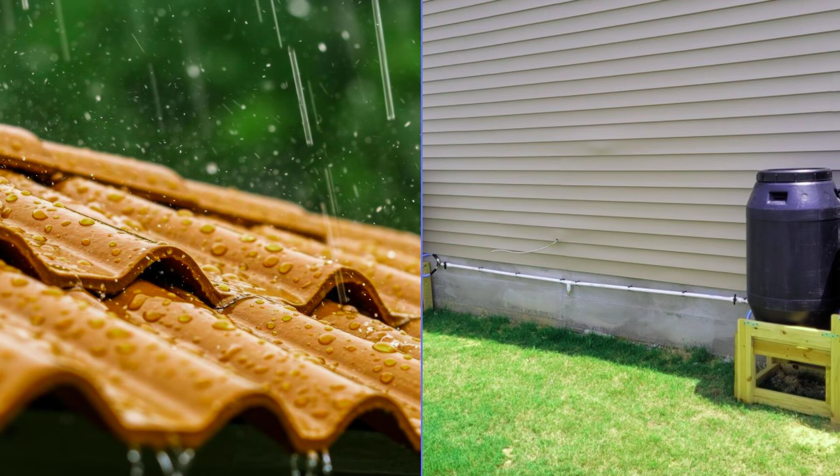Prior appropriation doctrine, written in the 1800s, claimed every raindrop as tributary to streams you have never seen. The water falling on your roof belonged to someone downstream before it hit your shingles. A 55-gallon barrel was a threat to agricultural water rights. The law said so. It is called rooftop rainwater harvesting. This is not a story about physics that does not work. This is a story about physics that works too well without generating a single bill.

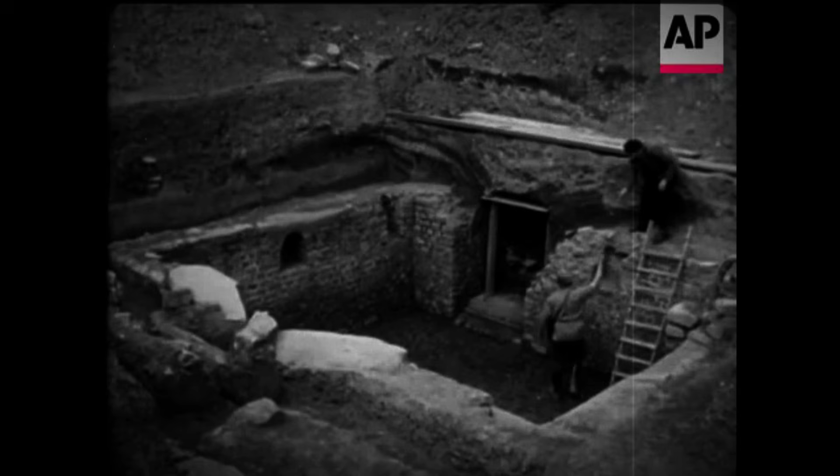Welcome to Forbidden Manual. The archive opens in 1930 in the jungle heat of the Yucatan Peninsula at the ruins of Uxmal. Eduardo Martinez, Chief Inspector of Archaeological Monuments for the state of Yucatan, stood before a hole in the limestone plaza that most visitors walked past without a second glance. It was bottle-shaped, carved into the bedrock, lined with plaster so fine it had survived 1,000 years of tropical storms.

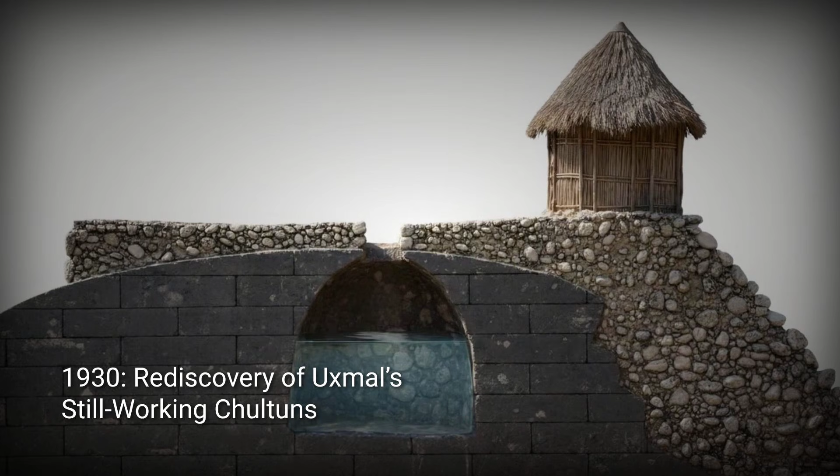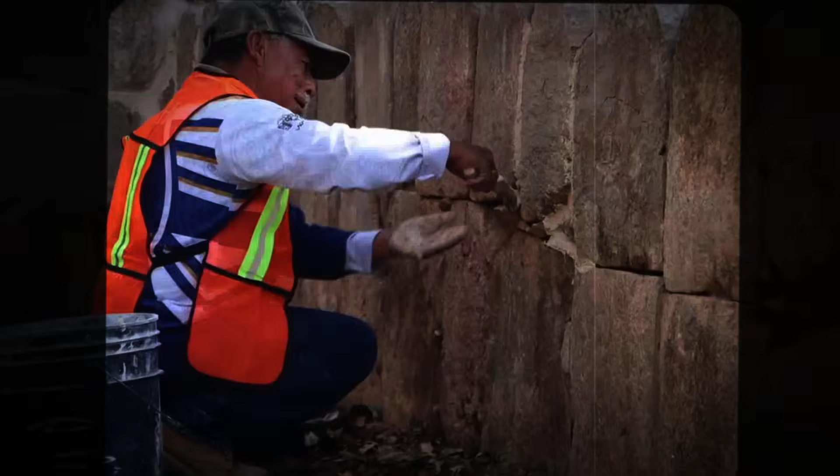The Maya had called these chambers chultuns, underground cisterns, designed to capture every drop of rain that fell on the stone surfaces above. Martinez made a decision that would prove more than he intended. He ordered the ancient plaster repaired. He allowed the cistern to fill. Weeks later, archaeologist Frans Blom arrived with his field crew, expecting to haul water from miles away. Instead, they drank from a cistern built before Europe had indoor plumbing.

The water was clean. The system worked. The Maya had solved this problem a millennium earlier. This was not a museum exhibit. This was functioning infrastructure. The Yucatan has no rivers, no lakes, no surface water at all in the Puuc region where Uxmal stands. The Maya sustained cities of tens of thousands using nothing but rain, stone catchment surfaces, and underground storage chambers carved into bedrock. They did not wait for engineers to invent the technology. They were the engineers. But the Maya were not alone.

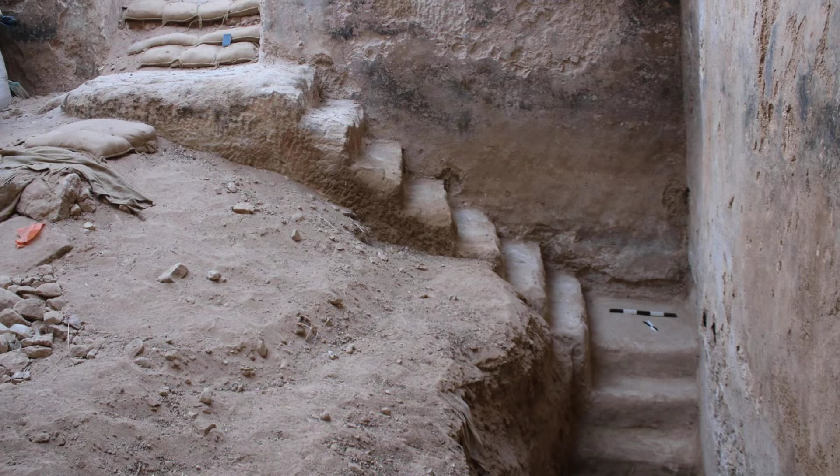Push the timeline further: the Negev highlands of the Levant in the 3rd millennium BCE. Peer-reviewed archaeology documents cistern systems designed for runoff and floodwater capture, baseline survival technology for Bronze Age civilizations across the eastern Mediterranean. The ability to store rain was not a luxury. It was the prerequisite for settlement. This was not experimental. This was civilization.

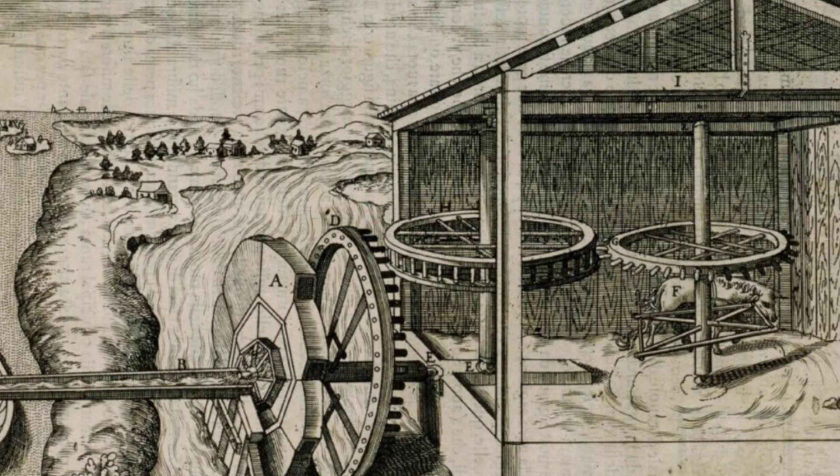Now move forward to early modern Venice. Historian David Gentilcore, writing in Water History in 2021, documented the city's dense network of cisterns, a fourth domestic water option alongside rivers, aqueducts, and wells. Venetian builders designed catchment surfaces, filtration layers, and storage chambers integrated into the urban fabric. Residents of one of Europe's most sophisticated cities drank captured rain. Venice was not off-grid. Venice was the center of Mediterranean commerce, and its water came from rooftops.

Four civilizations, four climate zones, four millennia, the same physics. Roof sheds water, gravity moves it downward, storage holds it until needed. The rain still falls, the roof still sheds, gravity still works. What changed was not the physics.

What changed was ownership, not of the water, but of the legal right to touch it. In 2010, the Texas Water Development Board contracted a team at the University of Texas at Austin to answer a question that seemed almost too simple. What happens to rain when it hits a roof?

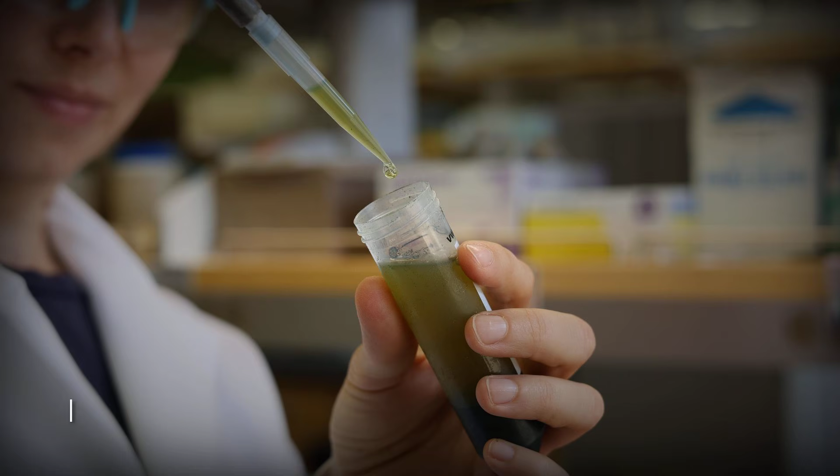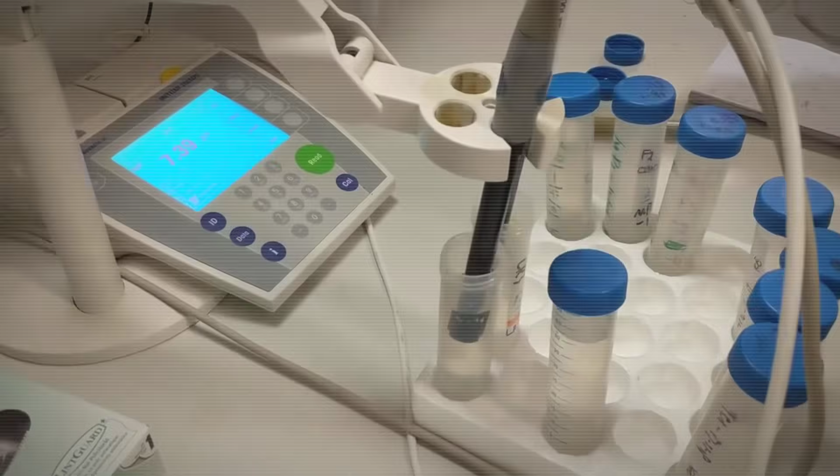Carolina B. Mendez and Bridget R. Afshar led the fieldwork under faculty researchers Kerry Kinney, Michael E. Barrett, and Mary Jo Kirisits. They built pilot-scale roofs using asphalt fiberglass shingle, Galvalume metal, and concrete tile, and they collected the runoff. They measured pH, they counted bacteria, they tested conductivity, they documented what the Maya had known for 1,000 years with the precision of a modern laboratory.

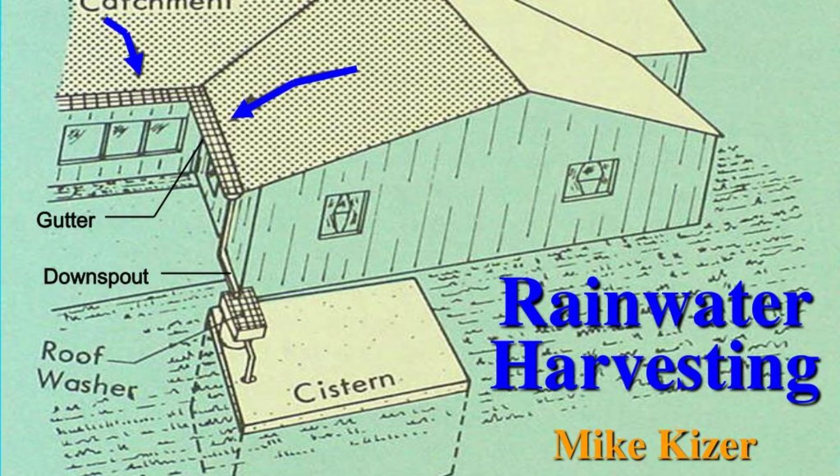Their findings were not controversial. They were inevitable. 1 inch of rain falling on 1,000 square feet of roof produces 623 gallons of water. That is the formula published by Texas A&M AgriLife Extension. Not theoretical yield, actual volume, minus only what splashes out or evaporates before reaching the gutter. A moderate storm on a modest home delivers enough water to fill 11 55-gallon barrels.

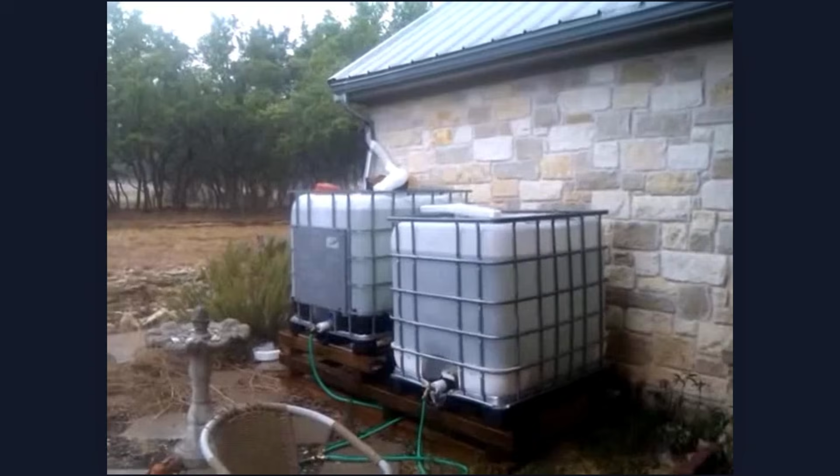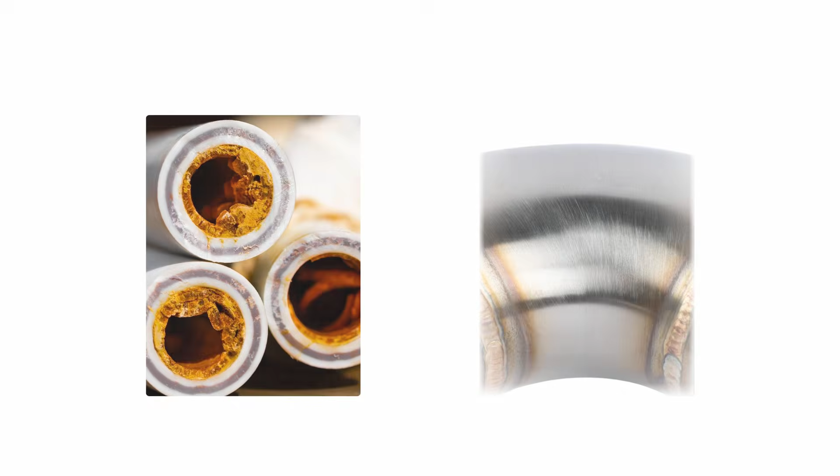The water arrives soft. The Texas Water Development Board confirmed what chemistry predicts. Rainwater has zero hardness. No calcium, no magnesium, no mineral deposits scaling your pipes, fouling your water heater, or leaving white residue on your fixtures. The agency's own manual describes rainwater as valued for its purity and softness. No treatment required for that quality. It falls from the sky that way.

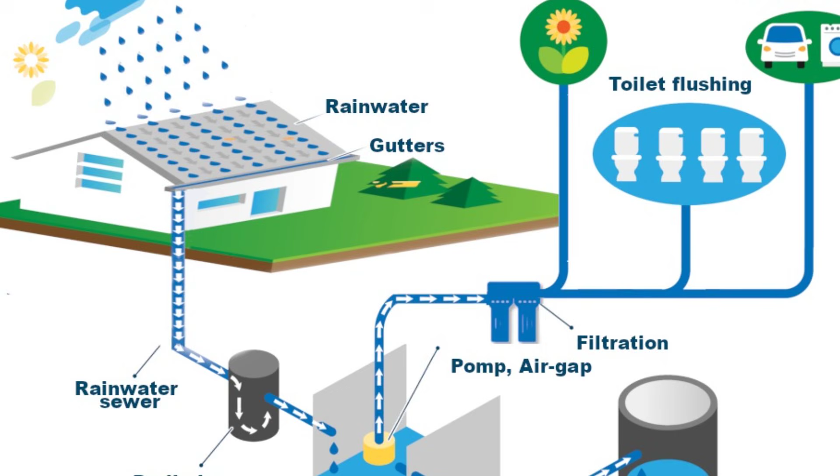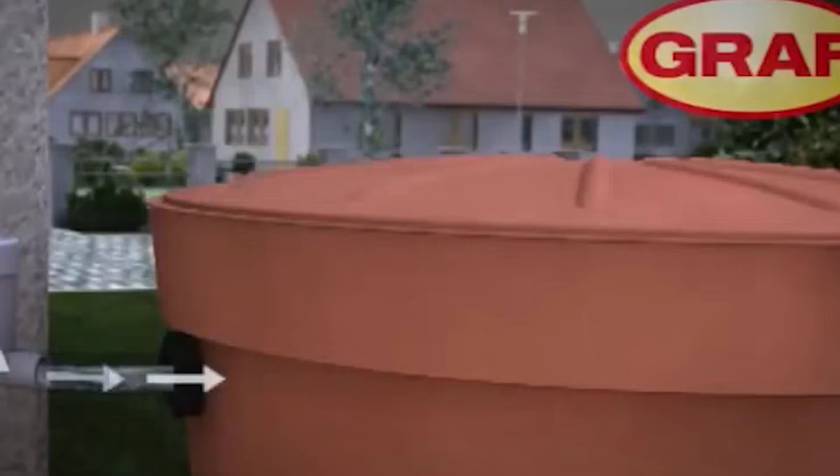Real-world capture systems lose some yield to overflow, first flush diversion, and roof wetting. 75 to 90% efficiency is the planning assumption. Contamination exists. Roof runoff carries dust, pollen, and bird droppings. First flush diverters route the dirtiest water away from storage. Filtration handles the rest. Potable use requires treatment, but the baseline quality starts cleaner than most municipal sources before chlorination.

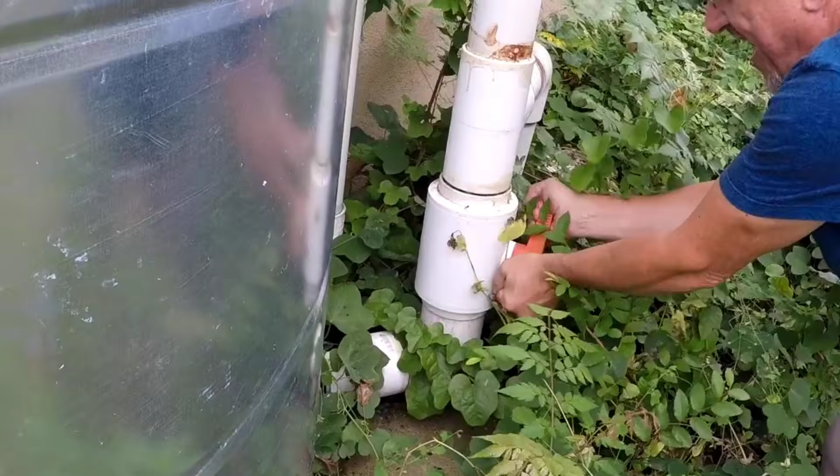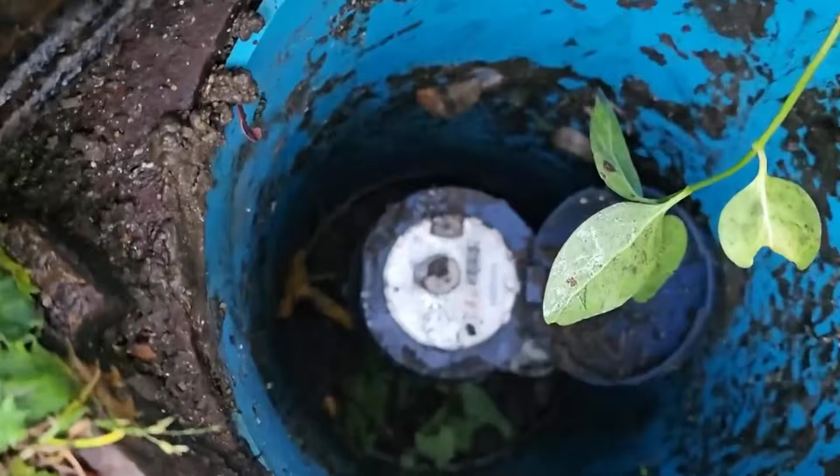Now feel what this means in your own home. Picture January. Your water bill arrives. $62. You paid for every gallon that came through the meter, the shower, the laundry, the dishwasher, the toilet you flushed 11 times yesterday. Now picture June. Your garden is dying in the heat. You drag a hose across the yard and watch the meter spin. Every gallon that touches your tomatoes adds to next month's bill. The rain that fell in April, the rain that pounded your roof for 6 hours, is 40 miles away in a municipal treatment plant. They are selling it back to you.

Your roof is already a catchment surface. Every storm, hundreds of gallons sheet off your shingles, pour through your downspouts, and vanish into the storm drain. You are not installing a new system. You are interrupting a loss. The barrel costs $70. It lasts 20 years. The water bill comes every month, forever.

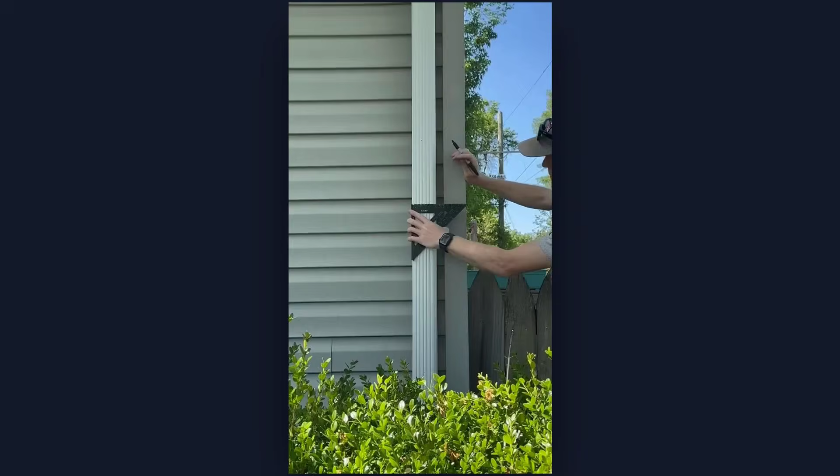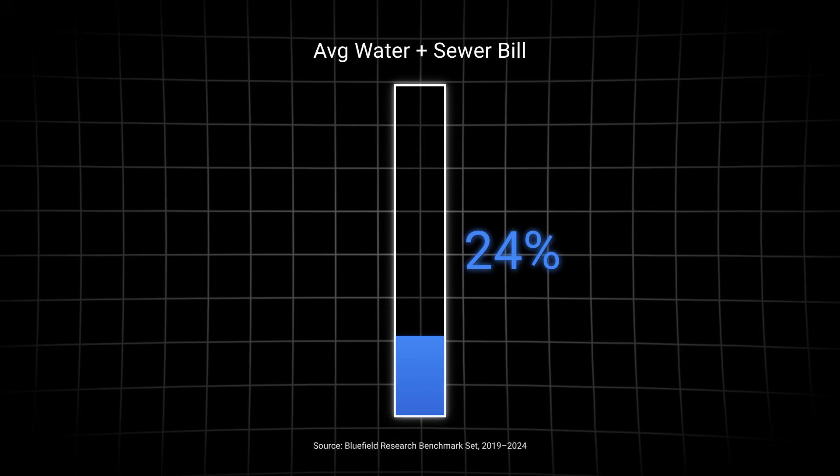A recycled food-grade barrel runs $50 to $75. A downspout diverter adds $15 to $30. Spigot, screen, and overflow fitting, another $30 at most. Salt Lake County, Utah offered complete setups at $57 through their May 2025 pickup program. Bluefield Research reported that combined water and sewer bills increased 24.1% across their benchmark set between 2019 and 2024.

The physics is trivial, the yield is documented, the softness is measured. So why did Colorado treat this as a water rights violation until 6 years ago? The answer is not hidden. It is written into law, 19th century law, carried forward without revision for over 100 years.

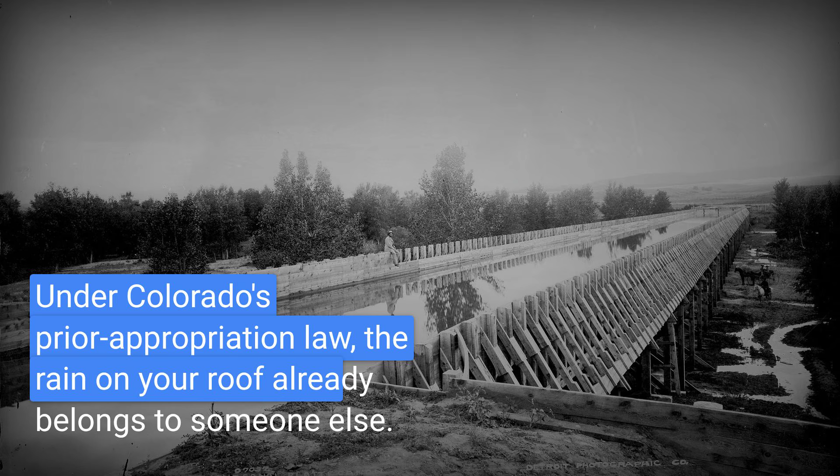In the American West, water is governed by a doctrine called prior appropriation. The principle is simple: first in time, first in right. The rancher who filed a claim on a stream in 1872 has senior rights over the farmer who filed in 1890. When water runs short, junior rights get cut off. Senior rights keep flowing. The doctrine was designed for streams, rivers, and irrigation ditches, but legislators and courts extended it further, much further. In Colorado, the state constitution declares water property of the public, subject to appropriation.

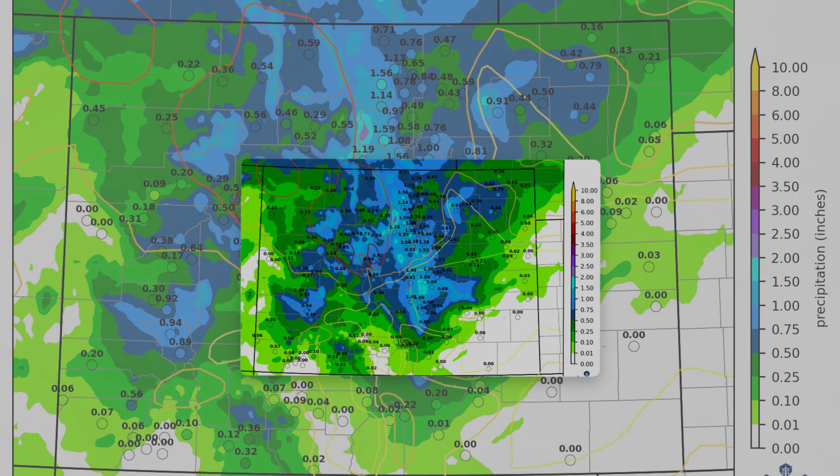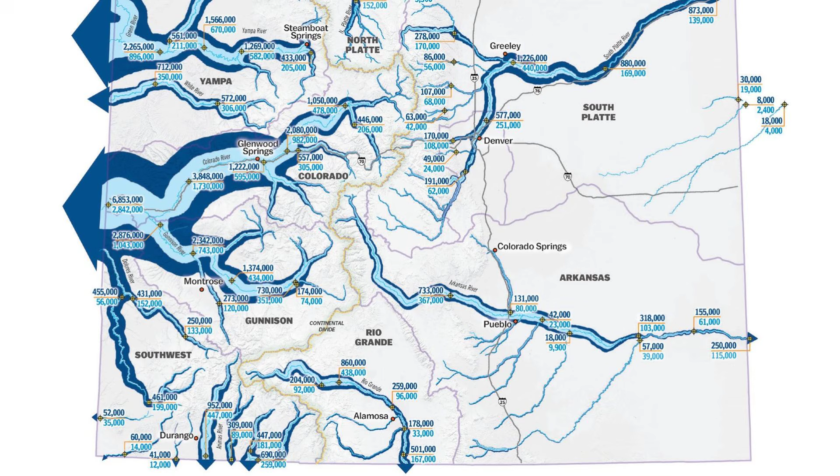Douglas County's official rainwater guidance uses language that makes the extension explicit. Precipitation captured and consumed out of priority may deprive downstream and senior rights holders of water that originates as snow and rain. Read that again. The rain on your roof was spoken for before it hit your shingles. Not by a corporation, by a legal doctrine that treated precipitation as tributary to streams you have never seen.

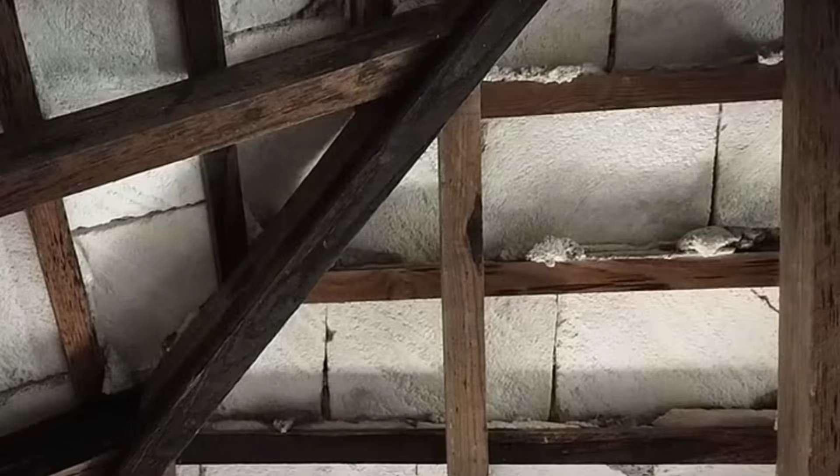For over a century, placing a barrel under your downspout in Colorado was, in the eyes of the law, diverting someone else's property. They wrote water law in the 1800s that claimed precipitation before it touched your roof. They maintained that doctrine for over a century, while Bermuda mandated the same technique by law. They created a legal structure where the simplest path for a homeowner was to do nothing and keep paying.

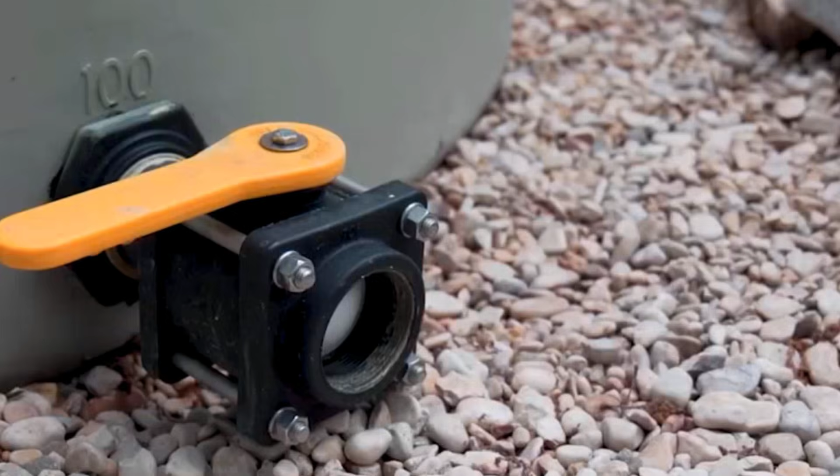Change came slowly. In Utah, Senator Scott K. Jenkins and floor sponsor Representative Patrick Painter shepherded Senate Bill 32 through the legislature. It took effect May 11, 2010. The new law allowed residents to collect rainwater with limits. 2 covered containers, each holding no more than 100 gallons, required no registration. Anything larger required filing with the State Division of Water Rights. The registration costs nothing, but the paperwork exists. Permission to store rain in excess of 200 gallons requires a form.

Nevada followed 7 years later. Assemblywoman Maggie Carlton sponsored Assembly Bill 138, signed in 2017. The law carved out a de minimis exemption: small-scale rooftop collection for non-potable domestic use no longer required a water appropriation permit. The barrier dropped, but only for limited capture.

Colorado held longest. You stand in your backyard in Aurora. It is May 2015. Rain is pouring off your roof, flooding your flower beds, rushing down the driveway into the street. You own the house. You own the roof. You do not own the right to put a barrel under the downspout. That is not a metaphor. That is the law.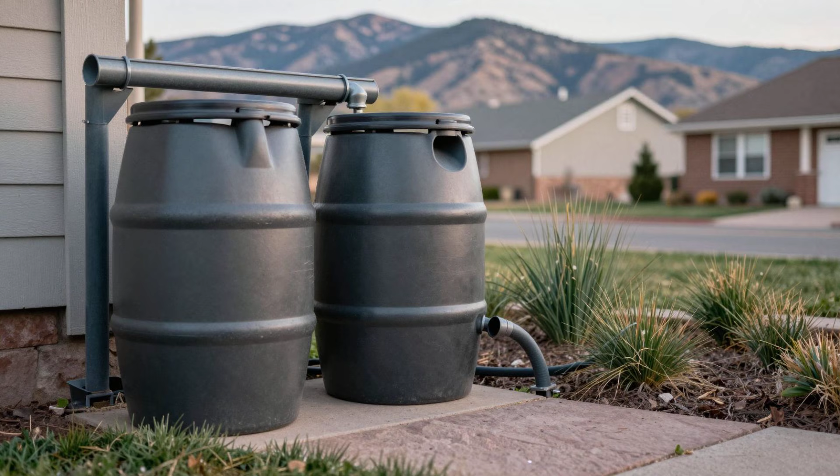1 year later, House Bill 16-1005 passed the Colorado legislature. Prime sponsors Representative Daneya Esgar, Representative Jessie Danielson, and Senator Michael Merrifield pushed it through committee and onto the governor's desk. The bill legalized residential rainwater collection within boundaries so narrow they read like a compromise with opponents who could not stop the tide entirely.

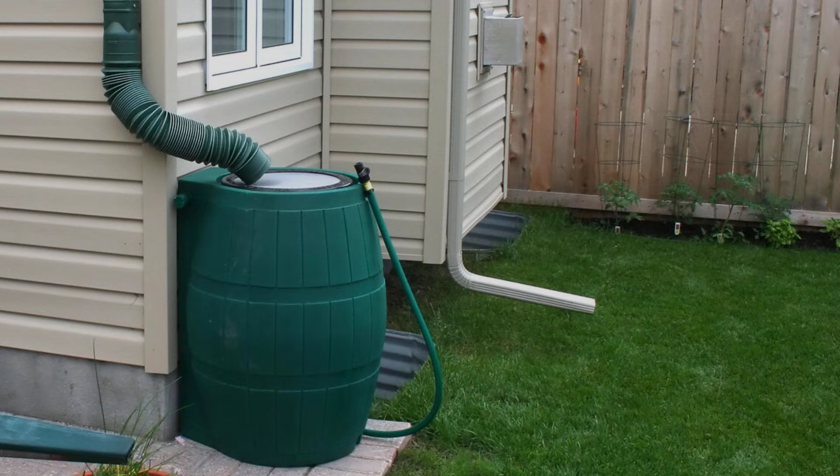2 rain barrels, 110 gallons total. Residential buildings with 4 or fewer units only. Outdoor use exclusively, lawns and gardens. Same property where collected. The bill included provisions for downstream injury reporting and directed the health department to develop vector control guidance. It prohibited homeowner associations from banning barrels outright, though aesthetic regulations remained permitted.

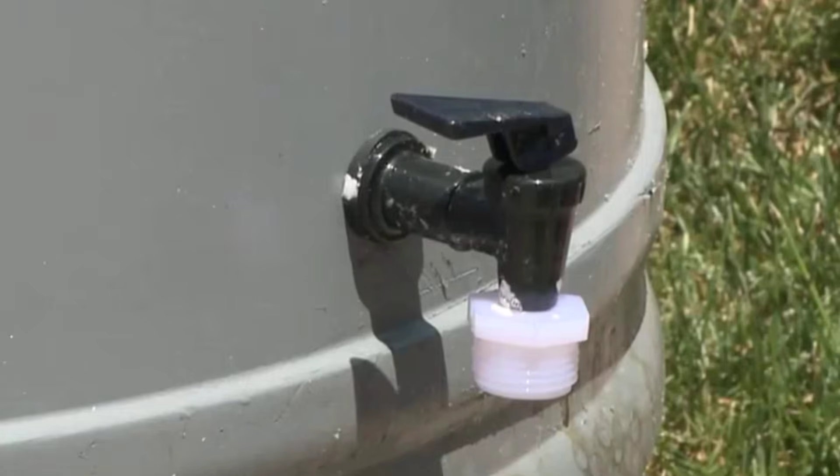They capped Colorado residents at 2 barrels and 110 gallons, enough to water a garden for perhaps 2 weeks. They restricted use to outdoor irrigation, ensuring you could not reduce your indoor water bill. They required injury reporting pathways, treating a 55-gallon barrel like a potential threat to agricultural water rights.

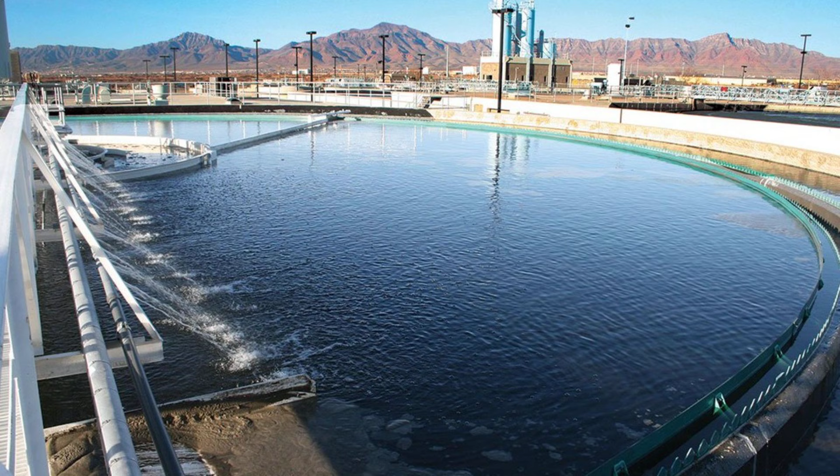The economic logic beneath the doctrine is not a conspiracy, it is structure. You cannot meter rain, you cannot bill gravity, you cannot create a subscription for a barrel that sits in your yard and fills itself. The technique that eliminates recurring revenue violates the economic model that fixed cost infrastructure depends on.

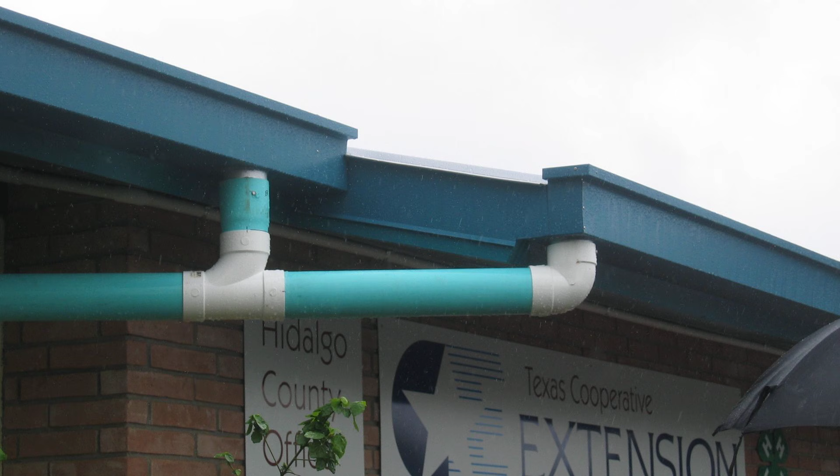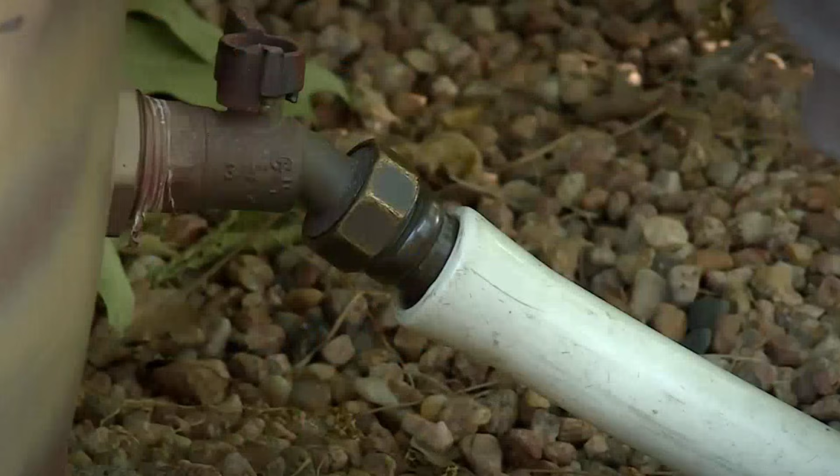The Texas Water Development Board, the same agency that publishes the state's official rainwater harvesting manual, acknowledges this tension openly. Their documentation describes rainwater harvesting as a way to reduce summer peak demand and delay treatment plant expansion. The agency calls the relationship between roof and storage tank a natural synergy. They note it reduces consumer utility bills. The state agency that promotes the technique acknowledges it saves money and delays infrastructure costs. The legal system spent a century blocking it anyway.

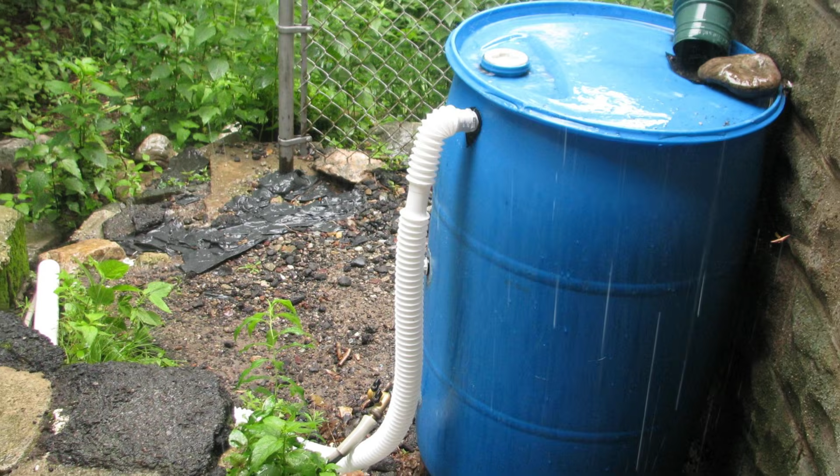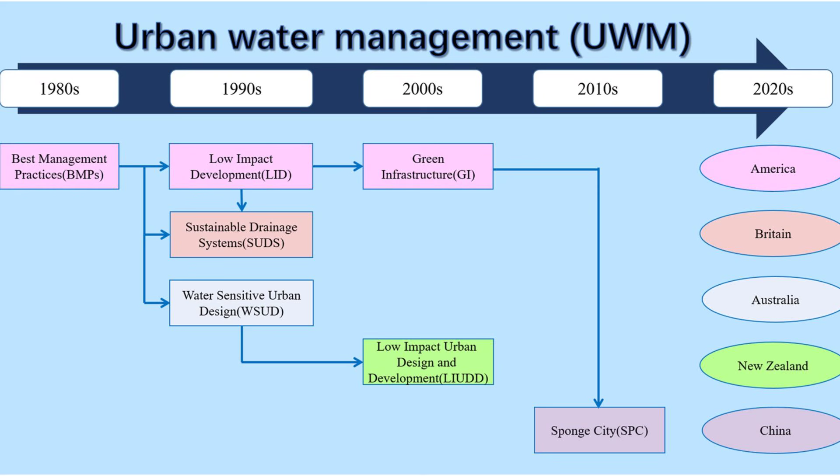The doctrine is cracking, slowly, unevenly, but the cracks are real. In Salt Lake County, Utah, conservation programs now sell subsidized rain barrels at pickup events, $57 for a 55-gallon setup ready to install. The same state that required registration until 2010 now helps residents get started. The barrels come with explicit guidance, landscape use only, not for drinking water storage. But the barrier has shifted from prohibition to paperwork to encouragement. Progress measured in 55-gallon increments.

At the AMD Spansion Semiconductor Facility in Austin, Texas, the math plays out at industrial scale. The Texas Water Development Board documented the site's rainwater and groundwater perimeter drain capture system, a 10,000-gallon fiberglass tank feeding landscape irrigation through inline flow meters. The facility saves approximately 4.75 million gallons per year. Return on investment, 3 years. This is not hypothetical. This is a Fortune 500 company proving the physics works.

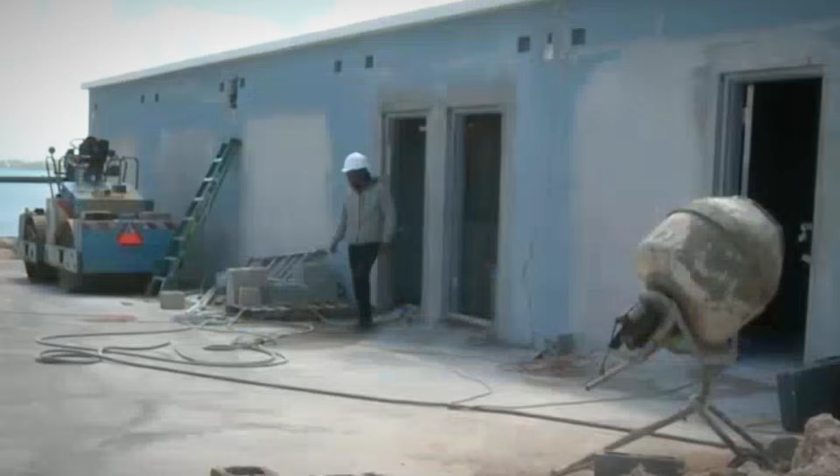But the sharpest contrast lies offshore. In Bermuda, rooftop rainwater harvesting is not permitted, it is mandated. The building code requires every structure to include a catchment roof and storage tank. Government documentation reports that approximately 85% of Bermuda residents use their tank water for drinking on a regular basis.

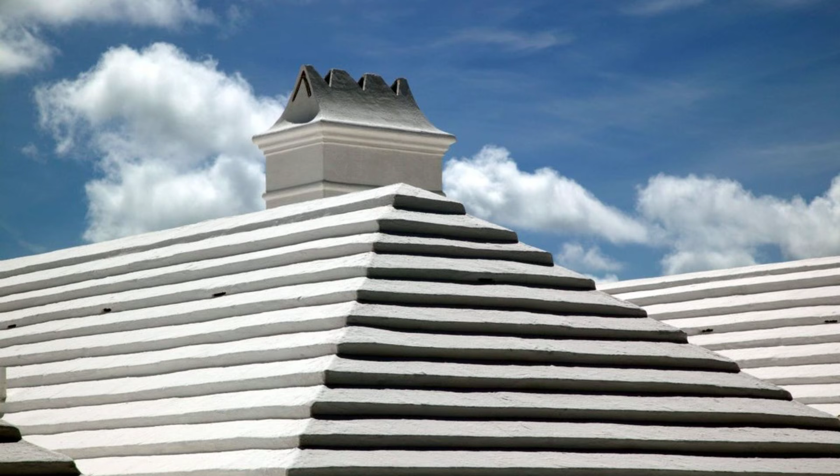Same Atlantic rainfall, same roofing materials, same gravity. In Bermuda, your roof is a legal obligation. In Colorado, it was a legal violation. The comparison grows sharper still. The Virgin Islands Code, Title 29, Section 308, has required cisterns on new construction since May 1, 1964. An American territory subject to federal oversight mandates the same system that Colorado prohibited for another 52 years.

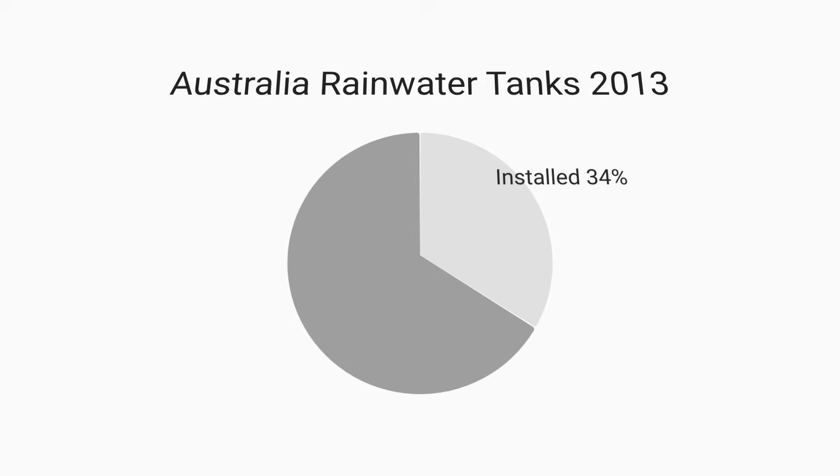Australia made the shift through economics. Australian Bureau of Statistics data from March 2013 showed 34% of households and dwellings suitable for a rainwater tank had installed one. The drivers were water restrictions during drought, rebate schemes that reduced upfront cost, building regulations that encouraged installation, and tiered pricing that made municipal water expensive. Australia made capture easy. America made it paperwork.

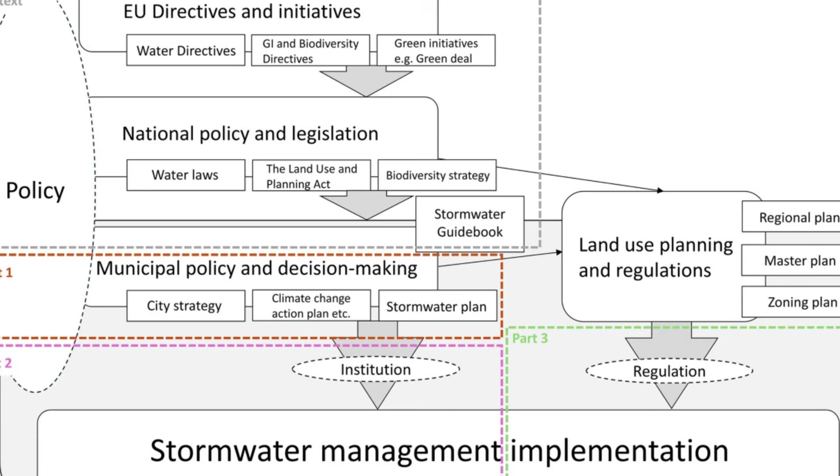Germany inverted the incentive structure entirely. European Environment Agency documentation of Bremen's stormwater policy describes separate fees for rainwater versus wastewater, calculated by impervious surface area. Install a capture system for toilets, irrigation, or storage, and your fee drops. Subsidies and refunds reinforce the economics. Germany built a system that rewards capture. America built doctrine that punished it.

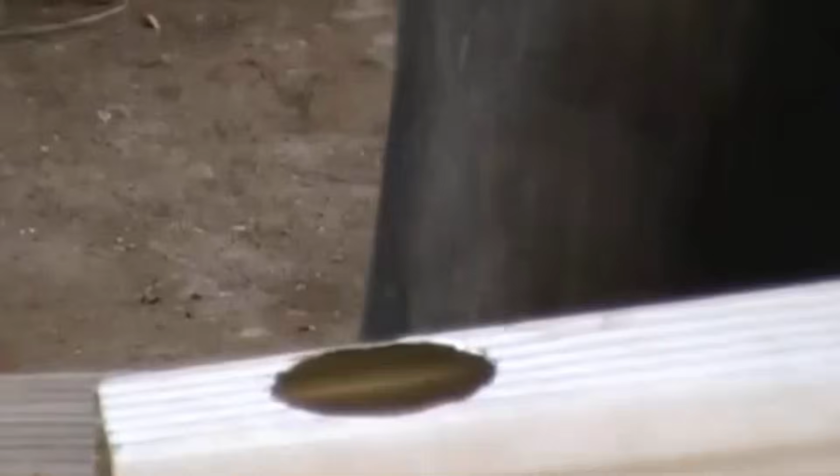The practical path is not complicated. A recycled food-grade 55-gallon barrel costs $57 to $75. A downspout diverter costs $15 to $30. A spigot, bulkhead fitting, debris screen, and mosquito mesh cost another $20 to $35. Cinder blocks or a wooden stand for elevation cost $15 to $25. Total system cost: $107 to $165.

Time required: one Saturday afternoon. Tools: saw, drill, hole saw, level. Skill level: handy homeowner. Colorado State University Extension emphasizes one compliance detail. The container must have a sealable lid to meet state law.

The legislators who broke the doctrine have names: Representative Daneya Esgar, Representative Jessie Danielson, Senator Michael Merrifield in 2016, Senator Scott K. Jenkins, and Representative Patrick Painter in 2010, Assemblywoman Maggie Carlton in Nevada in 2017. It took until 2016 for Colorado to allow two barrels. It took named legislators, committee hearings, and a bill with downstream injury provisions. The rain required a legal defense team.

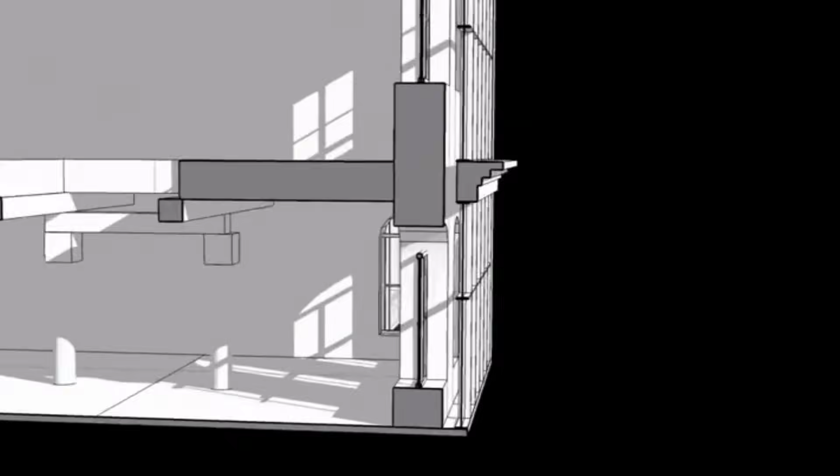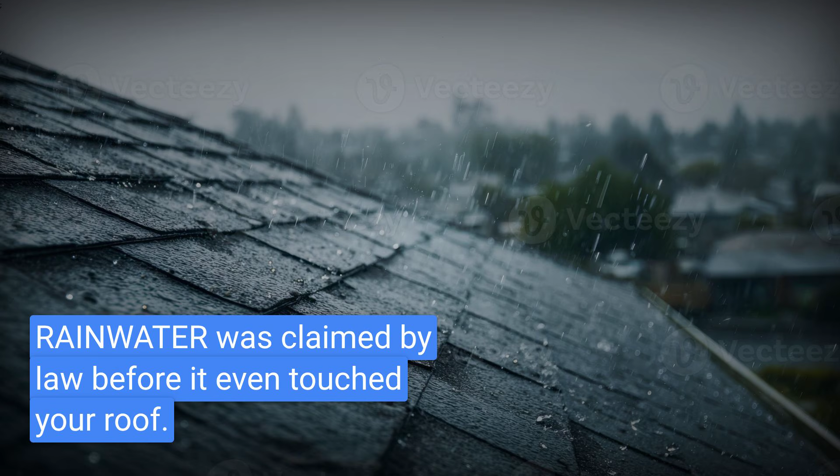Earth tubes were coded out. Passive solar was appraised away. Lime wash cooling was buried under HOA bylaws. Thermal mass walls were replaced by code with stick frame insulation. And rainwater, the most obvious, most ancient, most gravity-dependent source of household water, was claimed by doctrine before it hit your roof. Building methods that eliminate recurring bills are systematically excluded.

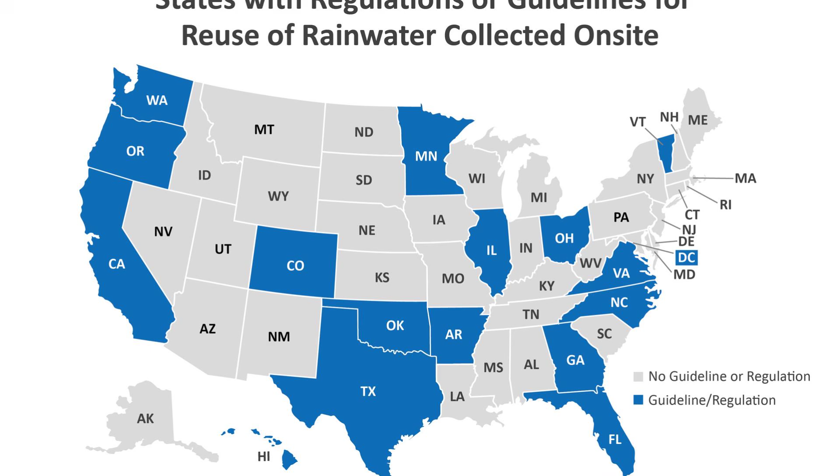The pattern repeats. They will not tell you that 85% of Bermuda residents drink rainwater captured from their roofs by legal mandate. They will not tell you that the U.S. Virgin Islands have required cisterns on new construction since 1964. They will not tell you that one inch of rain on your roof could fill six 55-gallon barrels, and that Colorado law caps you at two. They will not tell you that the Texas Water Development Board calls rainwater free and zero hardness, while most states offer no code pathway for indoor use.

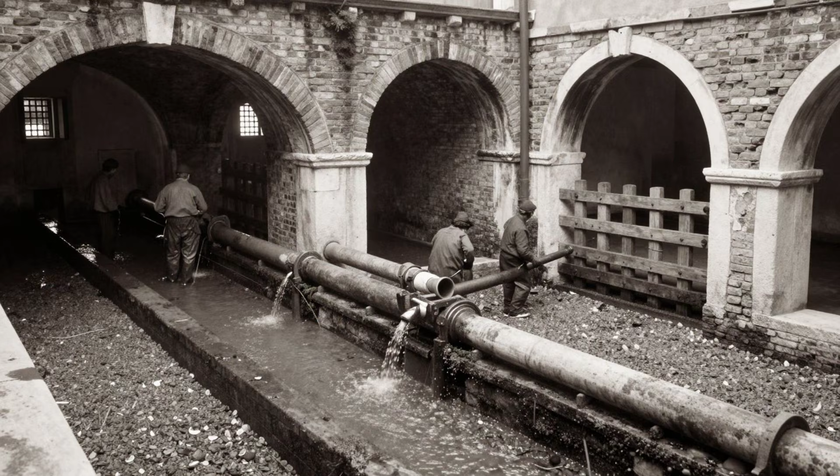One inch of rain on 1,000 square feet yields 623 gallons. The physics has not changed since the Maya carved cisterns into limestone beneath Uxmal. The physics has not changed since the Nabateans channeled rain through Petra. The physics has not changed since Venice built filtration chambers beneath its plazas. The doctrine changed. The ownership model changed. The assumption that water must arrive through a meter was invented recently.

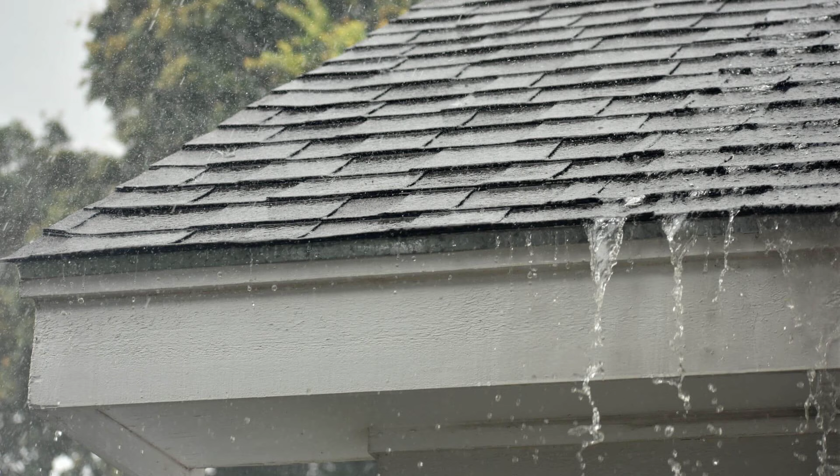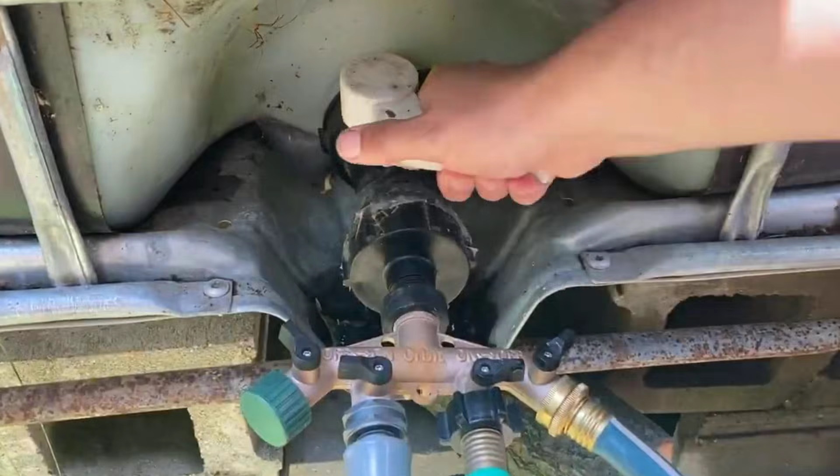The rain does not know it is regulated. It falls on your roof the same way it fell on Petra, on Venice, on the Yucatan. It waits for a gutter, a downspout, a barrel. It waits for you to decide that gravity is enough, that the water arriving for free does not require a subscription, a meter, or a monthly bill. A technique that requires no subscription, a material that requires no patent, a system that asks for no service contract, no recurring revenue, no permanent dependency.

The rain is still falling, the barrel is still $70. The only question is whether you will capture it or watch it drain into a system built to sell it back to you.

Next week, the ancient cooling technique that dropped interior temperatures 20 degrees using nothing but physics, mud, and a geometry the HVAC industry cannot sell. The archive opens in Shibam, Yemen, 1732.